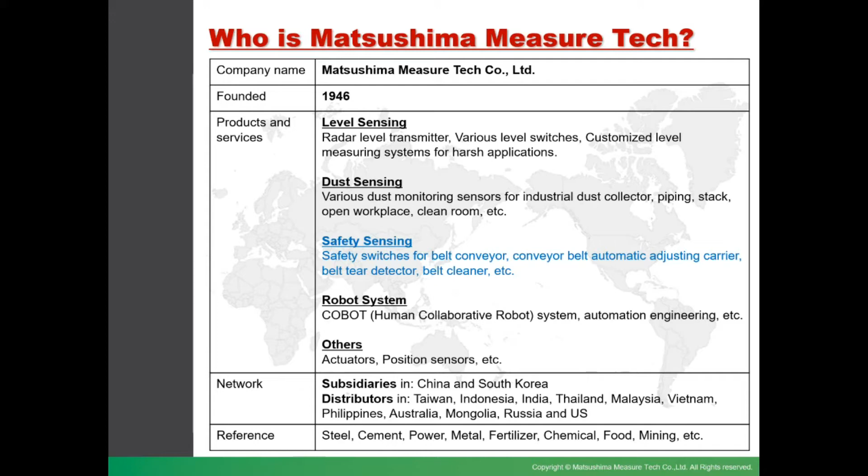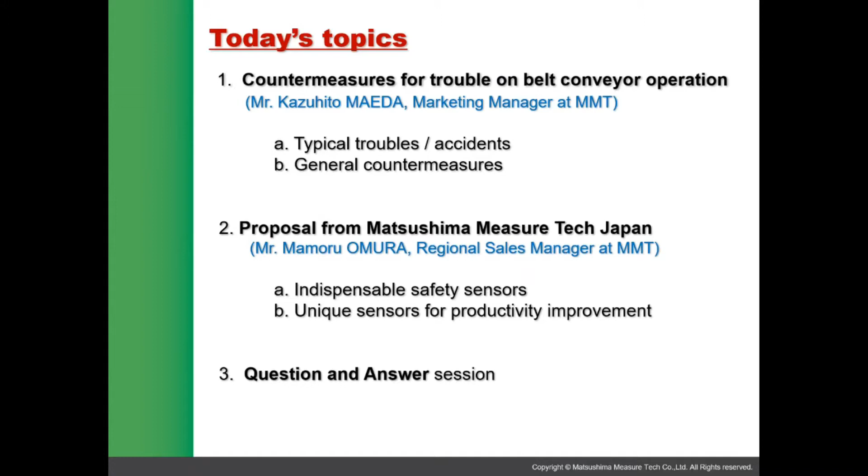Okay, this is today's topics. First session is for countermeasures for trouble on belt conveyor operation. I will provide information today about 6 types of typical troubles, major causes for those troubles, and general countermeasures. Second session will be provided by Mr. Mamoru Omura. He will be focusing on a few indispensable sensors and also introduce a few unique sensors for productivity improvements. Then, after this session, we will answer your questions.

Okay, so let me start the first session about countermeasures for trouble on belt conveyor operation. Actually, we've been involved in this industry over 70 years, since 1946. Based on this experience, we'd like to contribute to safe operation of belt conveyors by introducing a part of our experience and know-how. And we do hope our activity will be helpful to your activities and the industries.

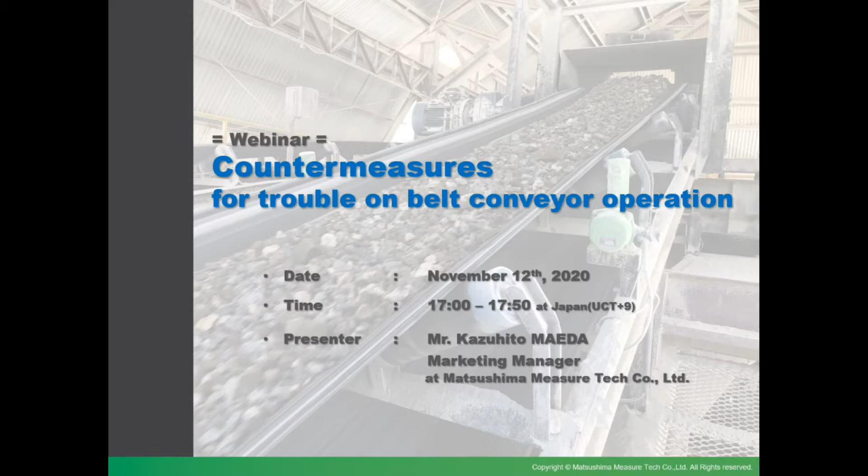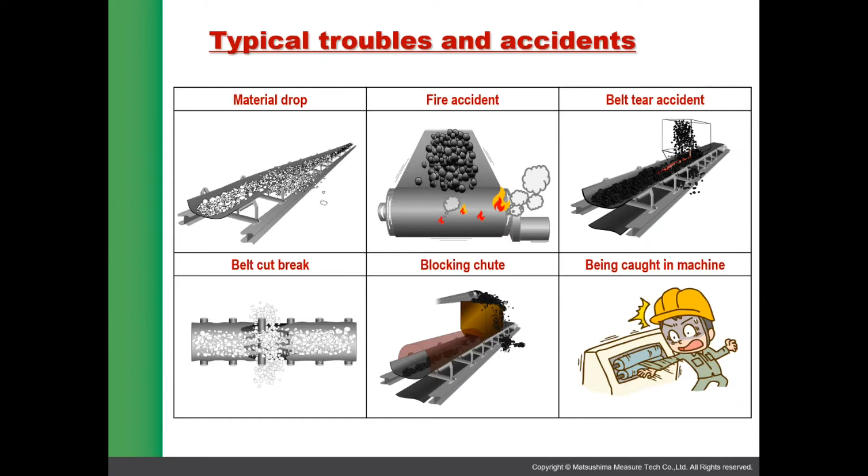Okay, today we are focusing on these 6 typical troubles and accidents, like material drop, fire accident, belt tear accident, belt cut break, blocking chute, and accidents that bring serious human injury. As you may understand, these are typical but really serious. These serious accidents, of course, cause huge loss in time and operation cost. But at the same time, they may bring maintenance cost rise, environmental pollution, human health damage or injury. So it's obvious we should take countermeasures as preventive maintenance. So let's see those causes and countermeasures one by one.

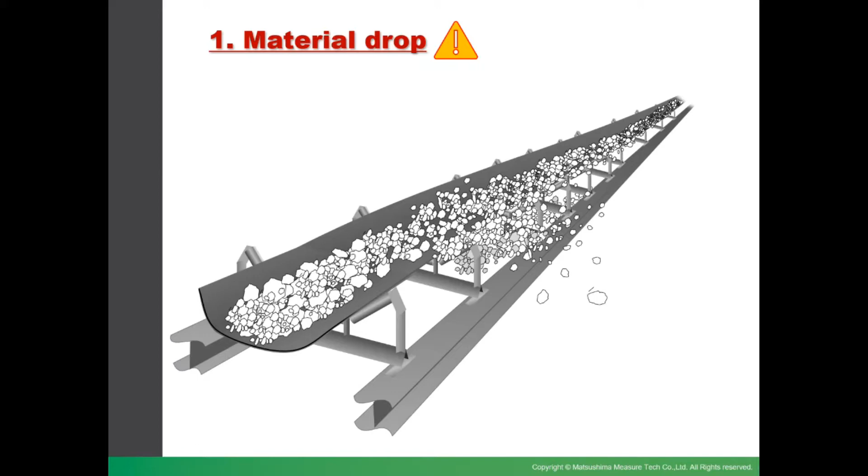First serious trouble is material drop. Belt conveyor runs on the balance of friction and tension. Belt conveyor is designed so that it may run straight without snaking or being misaligned, in case every condition is perfect and nothing changed from the ideal situation. But of course it's impossible, and that's why we have to take countermeasures. Anyway, the conveyor belt is not always aligned, but sometimes misaligned due to some conditions. And finally, it may cause material drop.

So what is the cause of such belt snaking or misalignment? We can say major causes are these 6 situations. Pulley or roller has got dirt buildup or adhesion. Roller is not rotating properly or broken. Transporting material is changed, loaded on one side or something. Skirt rubber is damaged or load material is bitten inside. Conveyor belt itself is damaged. Environmental situation change like heat, wind, moisture, rain or something.

All these factors may cause belt snaking or misalignment. And finally, it causes material drop, and of course it brings serious loss in productivity and maintenance cost. As you see those factors, it's really hard to solve fundamental causes. So we think it's important to take proper countermeasures, presuming that those causes may appear.

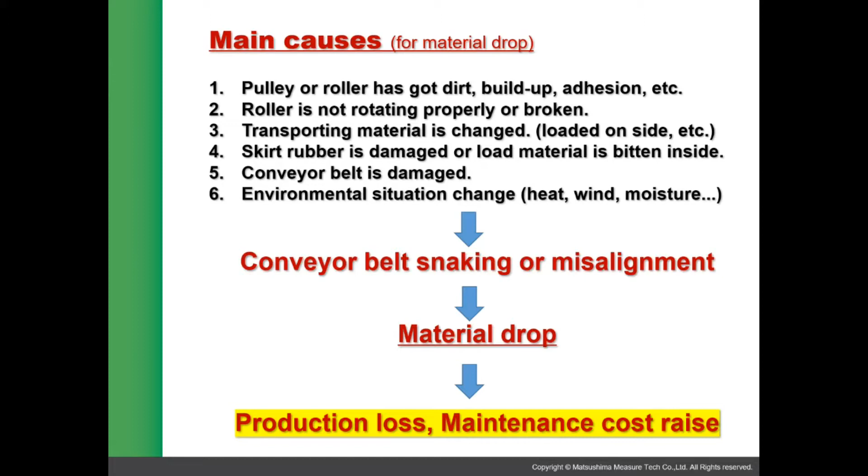Then here we offer these 4 countermeasures. The first one is to remove build-up material on the belt by belt cleaner. Belt cleaner prevents build-up on the belt surface. Then it means you can prevent build-up on the roller and pulley as well as the result.

Next solution is adjusting carrier. This carrier is to regulate the conveyor belt when it goes snaking or misaligned. Self-aligning mechanical carrier is the popular system, but in case the regulating performance is not enough for the site situation, then motor-operated adjusting carrier is the better solution.

The last one is belt sway switch to detect belt misalignment. You can get the alarm and the emergency stop signal when the belt is snaking or misaligned. Then you can stop the conveyor before material drop.

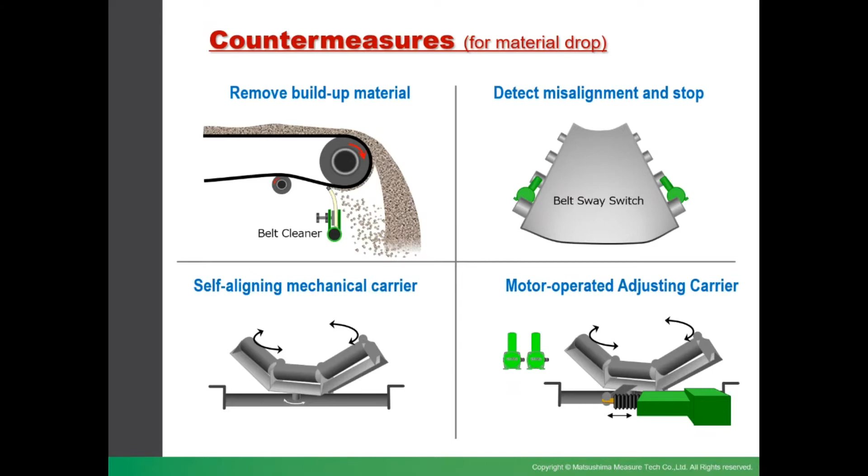Next trouble case is fire accident. As you may know, material of conveyor belt is rubber, and of course it's flammable. So it easily burns where there are fire sources at the site. This is also a serious accident and it may lose huge cost and time.

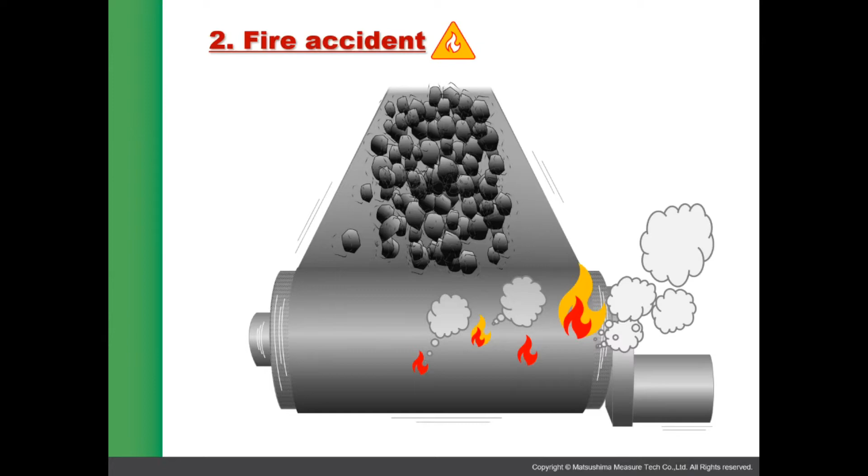Expected main causes for fire accident are shown here. Number 1, belt slip between conveyor belt and drive pulley. Number 2, heat due to malfunction of rotating parts like bearing or something. Number 3, friction heat between misaligned belt and frame. Number 4, heat generated from accumulated dust at roller stand or something else. The last one is ignition from the site work using fire.

Those causes may generate fire accident. Of course, it's also a serious accident, and in the result, it may cause production loss, maintenance cost raise, human injury, health damage, or air pollution. We have to take countermeasure for this as well.

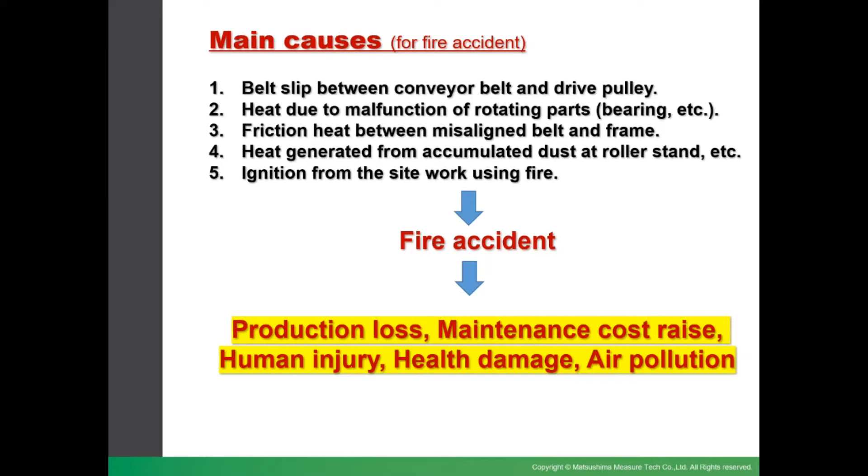These are the countermeasures for fire accident prevention. For the cause of belt slip, a detector should be the solution. This sensor is sometimes called speed switch, zero speed switch, or speed relay. All of them function the same. In case belt slip happens, then belt speed goes down. The speed switch detects dropped speed and sends the alarm or emergency stop signal so that you can stop the conveyor before fire accident happens.

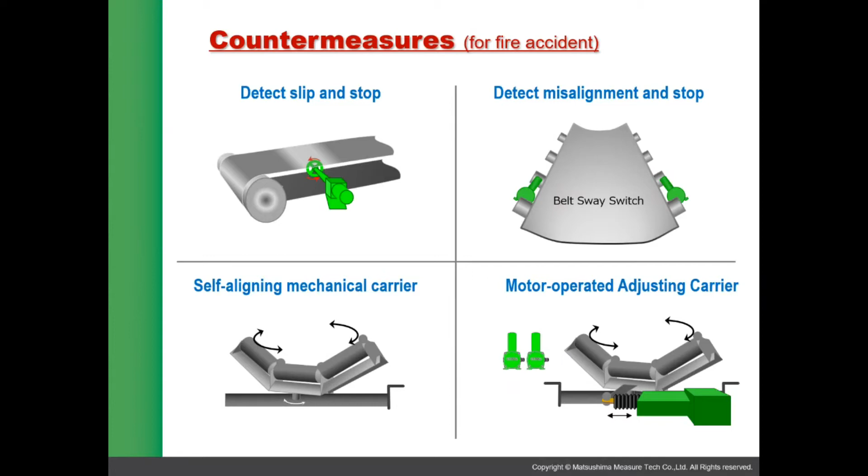For the cause of friction heat by belt misalignment, belt sway switch, self-aligning mechanical carrier, and motor-operated adjusting carrier are useful as explained in the material drop trouble section.

Next trouble case is belt tear accident. Sometimes wrong material or obstacles are mixed in the transported material. It's like a wood pole, metal tip, plastic, or something like that. If this wrong material sticks through the belt and is stuck there just below the transferring chute, then it happens. In the worst case, the belt will be completely torn out by the stuck wrong material. And in the result, of course, a lot of transporting material will be dropped out. It's a really serious accident, and it may waste huge money and time.

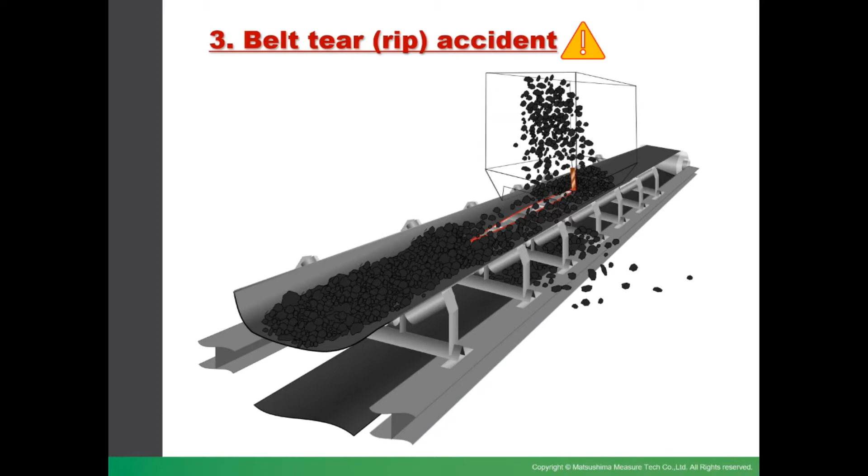So again, the main cause of such belt tear accident is wrong material or obstacle like sharp solid or metal mixed in the transporting material, which sticks through the conveyor belt and is stuck in the impact roller just below the transferring chute. This stuck wrong obstacle tears the conveyor belt. This is the belt tear accident.

And in the worst case, conveyor belt will be completely torn out. Then you have to prepare another complete belt. You have to place it again, and in the meantime, conveyor operation should be stopped. So it causes huge production loss and maintenance cost raise.

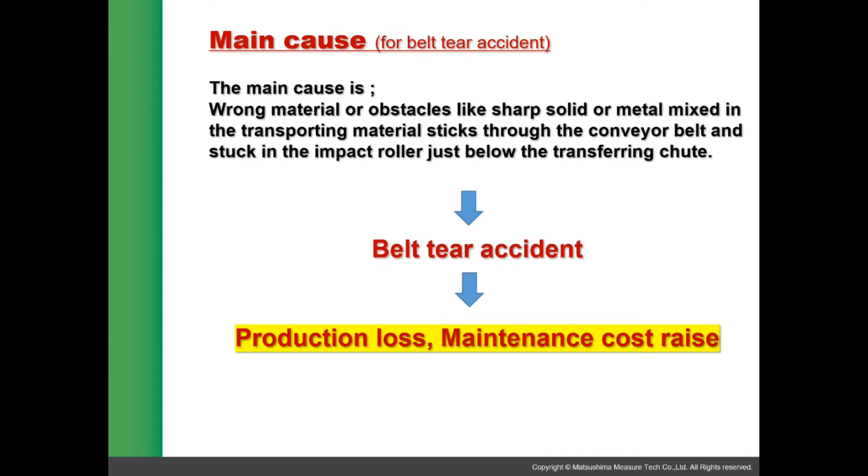Okay, these are effective countermeasures, I believe. In case the wrong obstacle is metal material, metal detector and magnetic separator will be a good solution. This is effective for metal material, but the weak point is, of course, it is not useful for non-conductive material like wood pole, plastic, or something else.

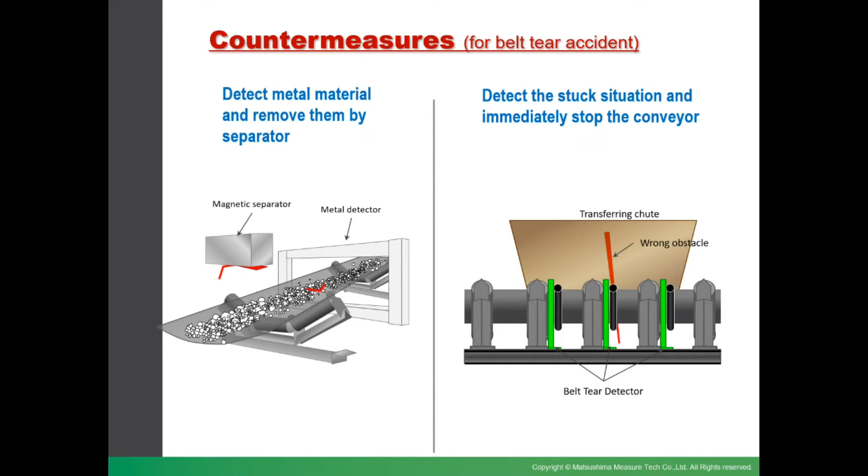So we generally recommend to install belt tear detector in every case. Sensor part of the detector system should be mounted just behind every impact roller below the transferring chute. This sensor immediately detects such wrong obstacles sticking to the belt, and it's possible to stop the conveyor in a few seconds so that you can minimize the loss.

Next serious trouble is belt cut break accident. We can say conveyor belt is a consumable part because it's tensioned and it gets impact load from loading material. In case the belt is continuously used for a long time over its lifetime, then this type of serious trouble is expected. This is really serious and dangerous. This accident may cause stop of operation, breakage of facility, and also serious human injury. Of course, it's better we take countermeasures.

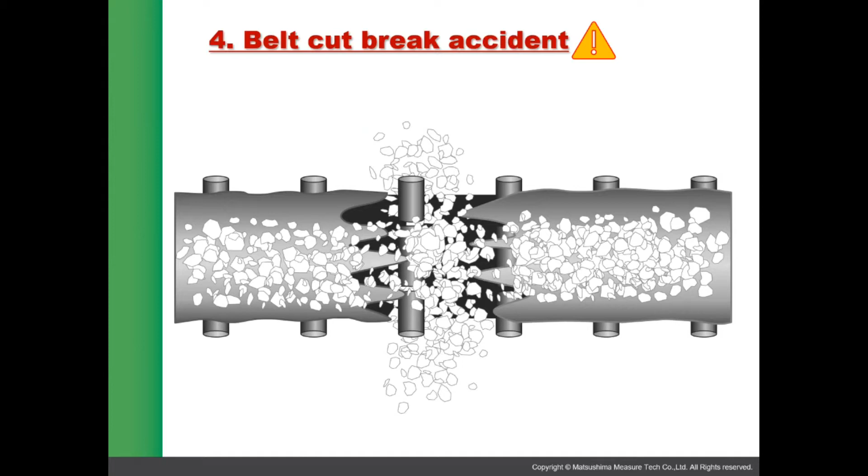Okay, these are the main causes for such a serious belt cut break accident. Number one, belt slip between the conveyor belt and drive pulley happens frequently. Number two, the rubber of the belt surface is worn and the inner fabric is exposed. In this case, you can see this phenomenon at many places. Number three, a crack or scratch on the inner fabric is observed. For example, you can see such damage over 10% of the width.

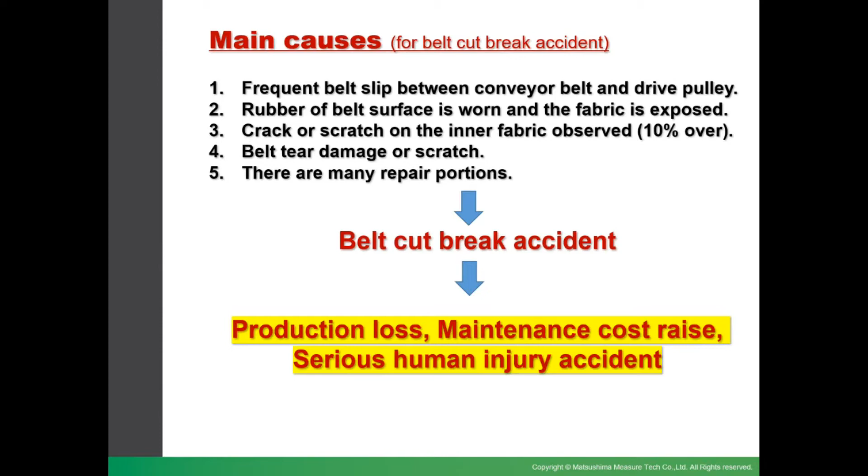Next is the case where the belt has damage, scratches or belt tears in many portions. And the last cause is the belt has many repair portions. When you observe such phenomena, a serious belt cut break accident may happen unless you take countermeasures beforehand. Once it happens, it may cause huge production loss, maintenance cost rise, and serious human injury accidents.

Such a belt cut break is a serious accident, but as I mentioned in the previous slide, there are many signs before it happens. In other words, it is possible to prevent the accident by taking the right countermeasures for such signs. You can take countermeasures with those sensors I explained in the previous troubles, like the speed switch for belt slip, belt sway switch, and belt tear detector. And also, we feel it's very important to establish an appropriate judgment criterion to replace the belt.

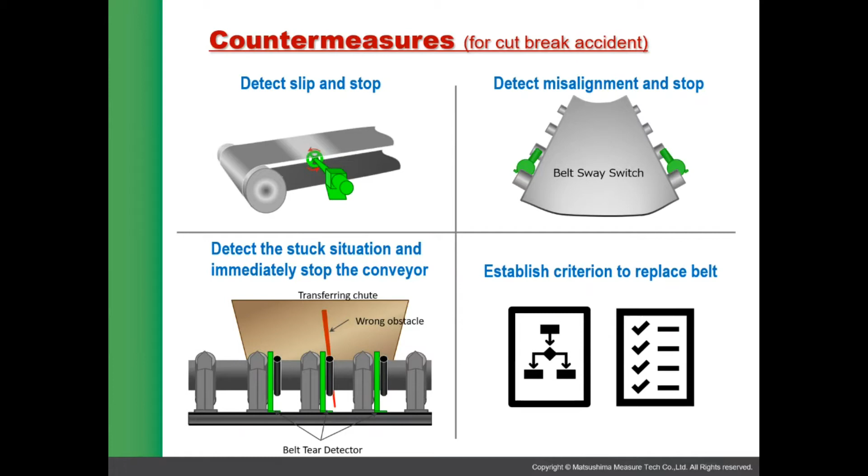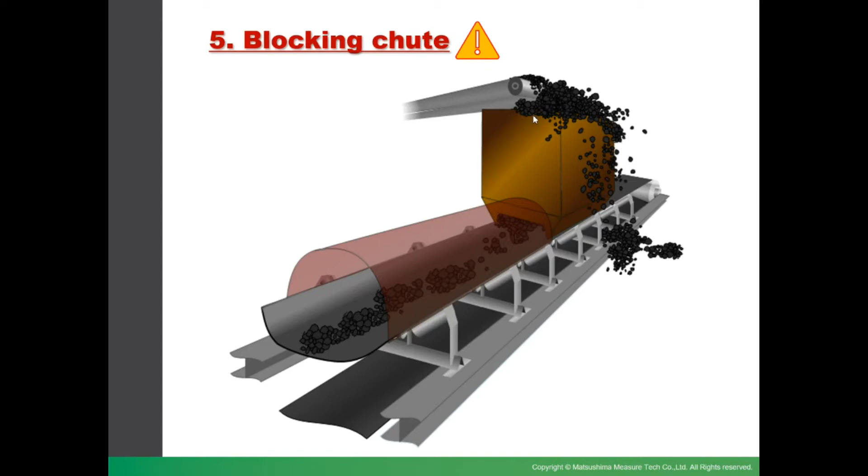The next serious trouble is the blocking chute accident. This is also serious. In the worst case, the transferring chute overflows and a lot of material drops. Besides, it may cause serious damage to the facility, and it may also bring some environmental pollution as well. Okay.

So the main causes for this blocking chute trouble are as follows. The conveyor belt is slipping, the load material is not going forward and keeps staying below the transferring chute. And the transported material is stuck in the transferring chute and not charged onto the conveyor. So it causes a blocking chute accident. And finally, it may cause production loss, maintenance cost rise, and environmental pollution.

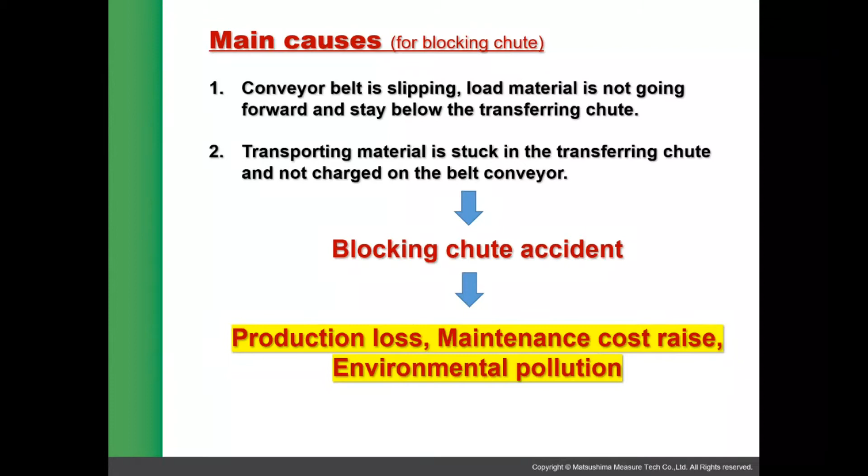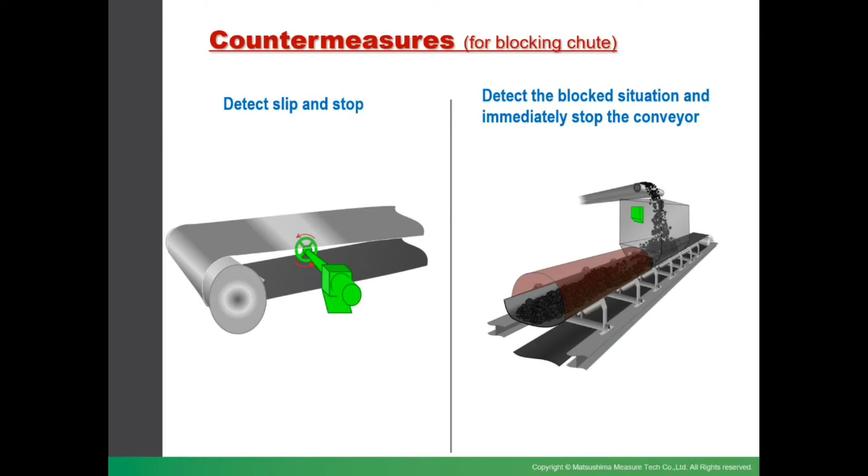As I explained a few times for the other troubles, belt slip detection by speed switch is the solution for the belt slip situation. And for a blocked situation inside the transferring chute, a point level detection switch will be the effective countermeasure. You can install the right level switches as upper limit detection to stop the conveyor. Actually, there are various types of level switches according to the type of transported material. But for detailed level switches, we are considering having another web seminar in the future, including continuous level transmitters. So please let me skip the detail for level switches today.

A conveyor facility has a lot of hazardous sources, such as rotating components or driving machines. If a human is caught in the machine, needless to say, it's very serious. So I believe in most cases the conveyor must have a safety cover or the area should generally be a keep-out area. However, there is no end to such human injury accidents, so we have to take countermeasures.

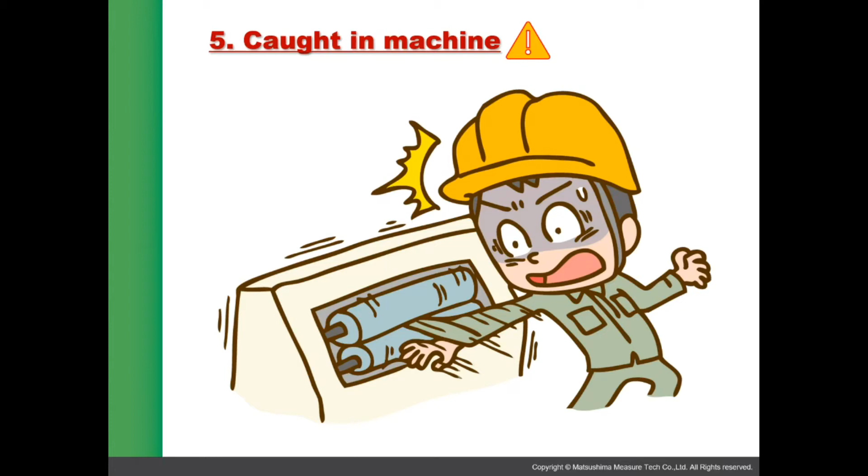The main cause of this accident, in a word, is human error. I'm going to read out those typical human errors. Number one, someone started the conveyor during the repair work. Number two, the self-driving system started the conveyor during human repair work at the site. Number three, someone did the build-up removal work without stopping the conveyor. Number four, someone unintentionally touched the rotating pulley at a conveyor without a safety cover.

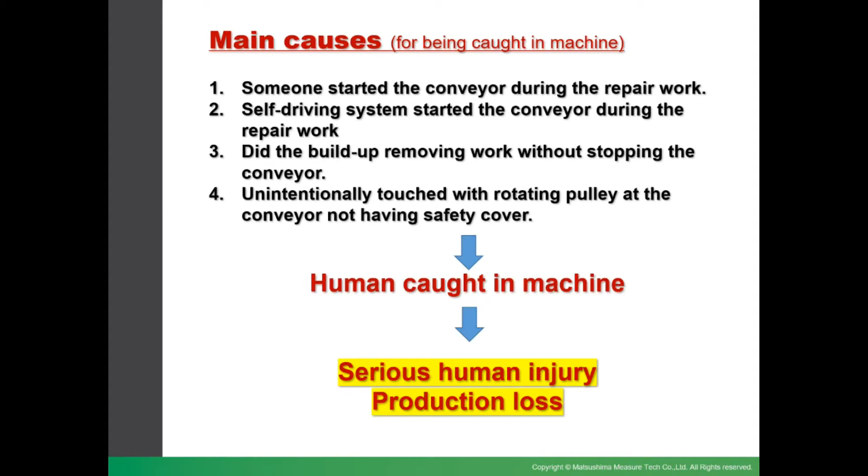Then such an accident, where a human is caught in the machine, happens. It may cause serious human injury as well as production loss. Actually, I feel completely eliminating such human error is quite difficult. So we have to take countermeasures on the assumption that human error happens.

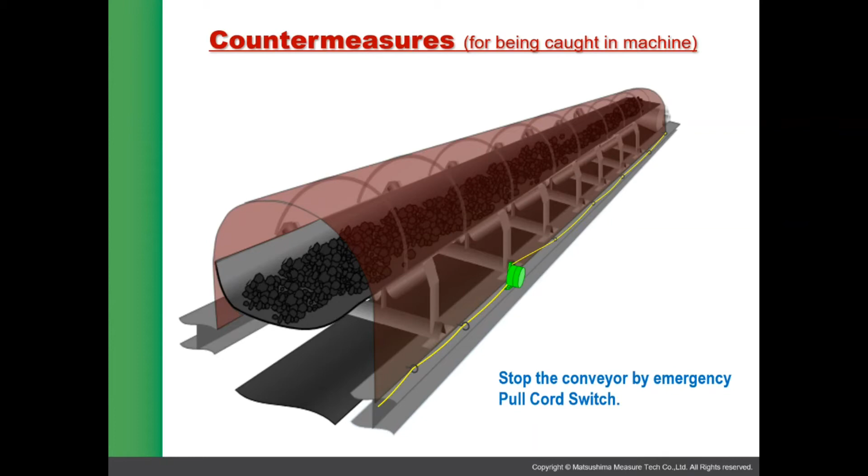Okay, so I picked up 6 types of serious troubles, like material drop, belt accidents, blocked chute problems, and others. And these are 9 types of common countermeasures effective for those 6 troubles. Today, I've just mentioned the types of countermeasures because time is limited. But we are considering having another web seminar for more details of those 9 countermeasures, including points of attention and how to use them.

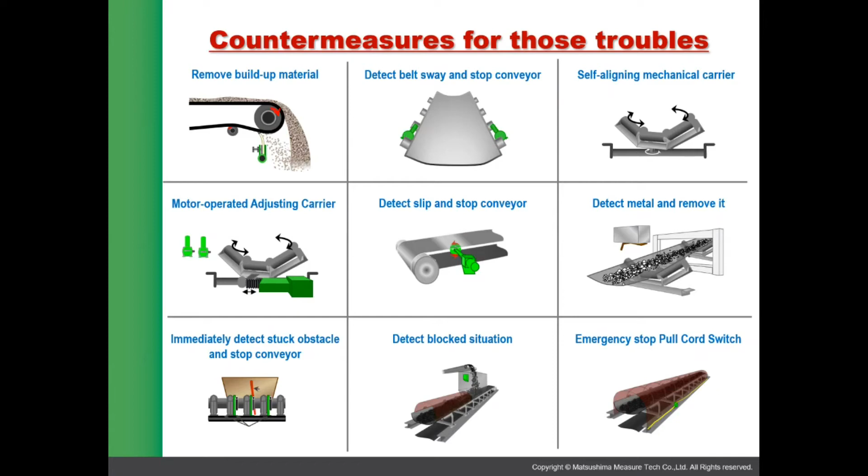Okay, so just a moment.

Okay, thank you so much for your attention on my part, countermeasures for trouble on belt conveyor operation, today. I will be very happy if my part is helpful and useful for your activities and operations or something like that.

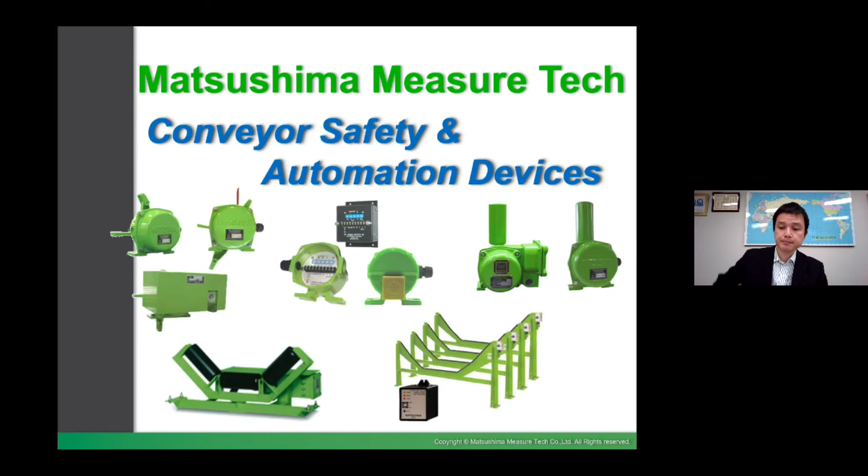Thank you, Mr. Maeda. I'm Mamoru Omura, export staff in Matsushima Measure Tech. Now you found out the importance of safe conveyor operation. In my section, I'd like to introduce the Matsushima conveyor safety and automation devices to support your safe conveyor operation. I'd like to introduce the 2 types of conveyor protection switches. One is a simple safety switch, and another type is Matsushima unique protection devices.

First one is the simple safety switches. I expect that most participants are already familiar with these switches. They are simple switches, but they are essential for safe conveyor operation. Therefore, Matsushima switches are selected and applied by many industries in the world because they are highly reliable and highly durable.

The first switch is a pull cord switch. It stops the conveyor immediately to minimize the accident or casualty. If it is delayed to stop the conveyor, it results in a critical accident. Also, the pull cord switch can be applied for accident prevention at the conveyors. When walking around the conveyor, for example, idler replacement work, the activation of the pull cord switch is one of the precaution treatments as the interlock at the site, because the conveyor cannot be activated by mistake.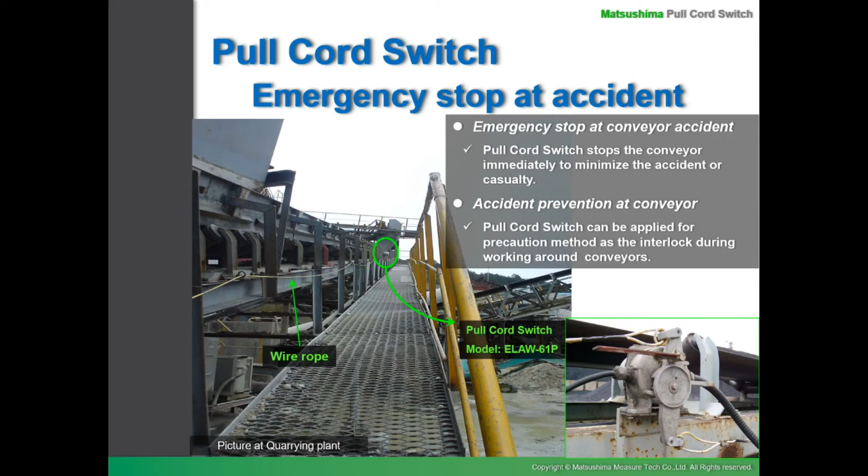We have option models for the pull cord switch: explosion-proof type, DC micro switch type, and salt-resistant coating type to use near the ocean.

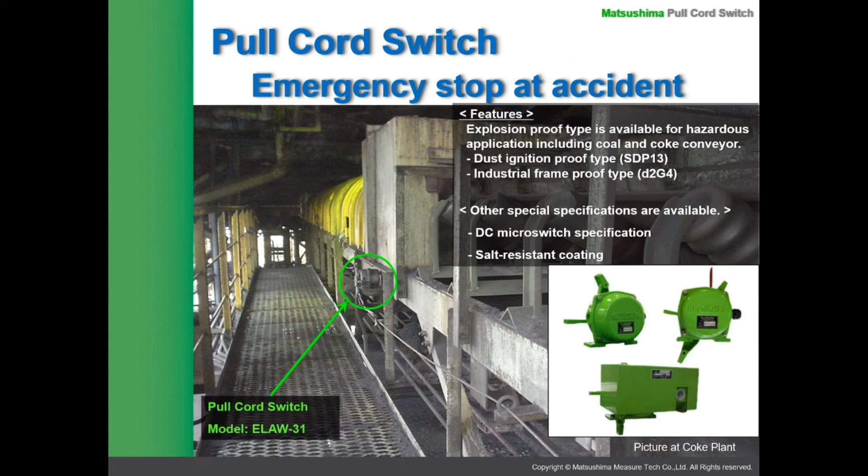We also have an advanced model, so-called PULLSTOP. It is an emergency switch complied with ISO standard. It has several advanced specifications. First, you can find in this picture, the wire rope is kept tensioned for this switch. If a wire rope is cut off, PULLSTOP detects it and outputs the signal. Next, the push button is also available for the emergency stop. Also, a total of 100 meters, 50 meters for each side, can be covered by only one unit.

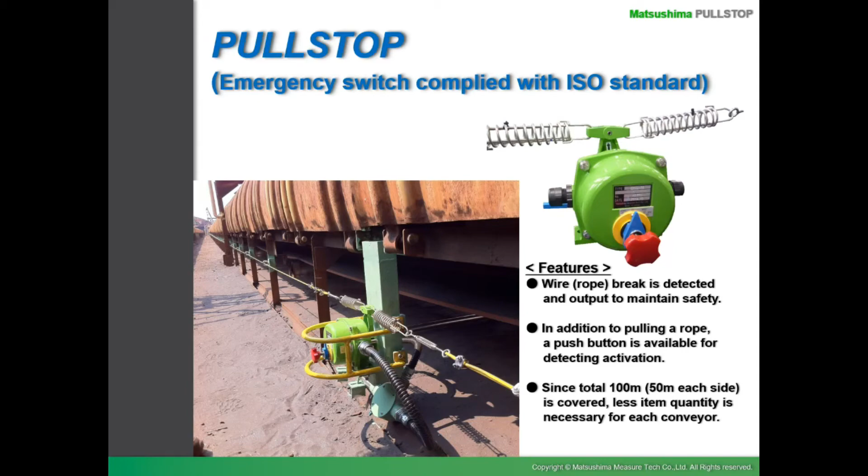Second model is the belt sway switch. When the conveyor belt is misaligned, the materials on the conveyor fall down. It causes loss of the materials and may cause an accident. Also, the edge of the conveyor belt gets the impact by the friction with the facility. It reduces the belt lifetime. The belt sway switch detects this misalignment and prevents these losses and accidents.

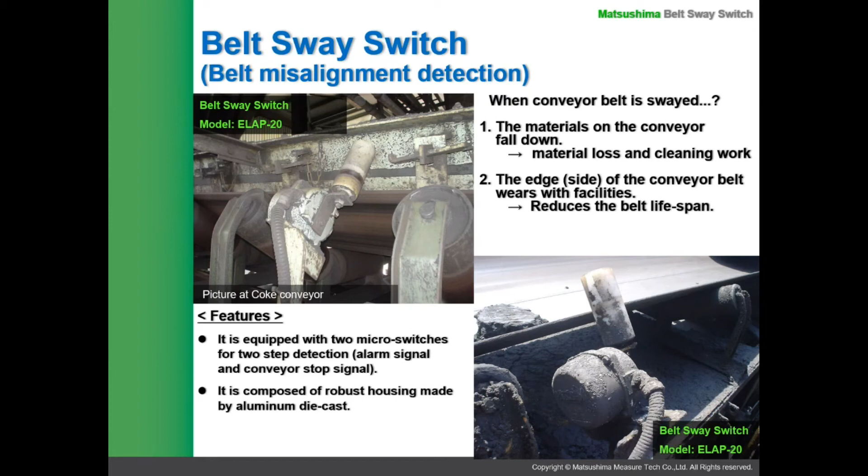As a feature, it is equipped with two micro switches for two-step detection. One for alarm signal and another one for conveyor stop. Also, because it has a robust housing made of aluminum die cast, it can be applied in heavy-duty environments like these pictures. We have option models for the belt sway switch: DC micro switch type, salt resistant type, stainless material for the touch pulley type, special operating angle type, also explosion proof type.

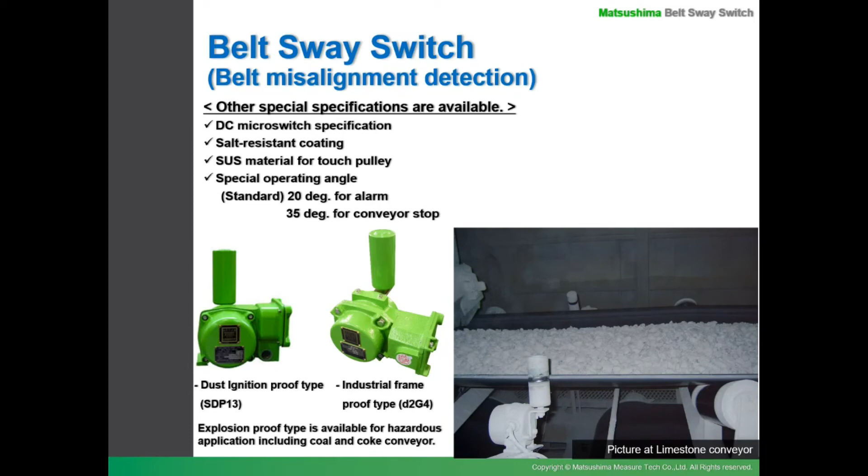The next simple switch is the two types of speed sensor. First one is the magnetic type, which does not require a power supply. When the conveyor belt slips, the friction between the belt and the driving pulley may cause a fire accident. The speed relay detects these belt slips and outputs the signal to stop the conveyor before the fire accident.

As features of the speed relay, because power supply is not required, the wiring installation cost and work can be reduced. Also, because it is mechanically activated by the magnetic function, it can work even in the case of power outage. Our speed relay also can be applied for overspeed detection, for example, cranes and elevators.

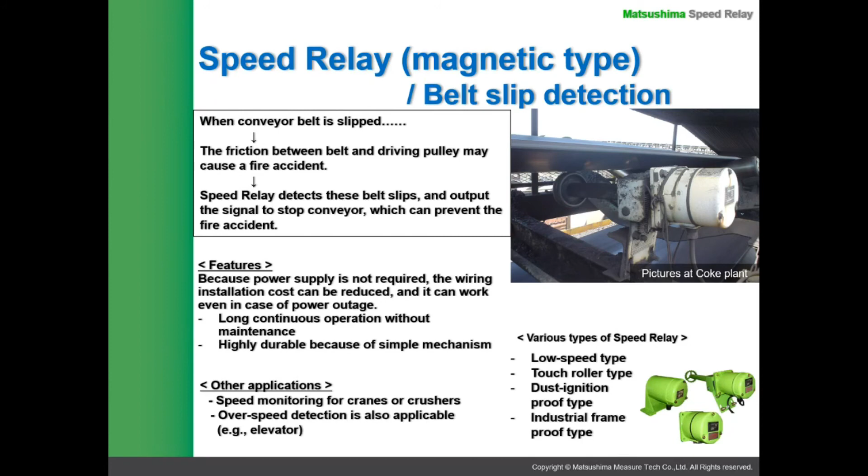The second type of speed monitoring sensor is the proximity switch type, so-called speed switch. As a feature of the speed switch, because it is a proximity switch, it is a non-contact sensor. Also, actuating speed can be set up at the site by the customers, and a wide range of power supply is applicable: DC 24 volts and AC 20 through 240 volts. We have a variety of types of speed switch: separated proximity switch type, transducer in panel mounting type, touch roller type, and intrinsic safety type.

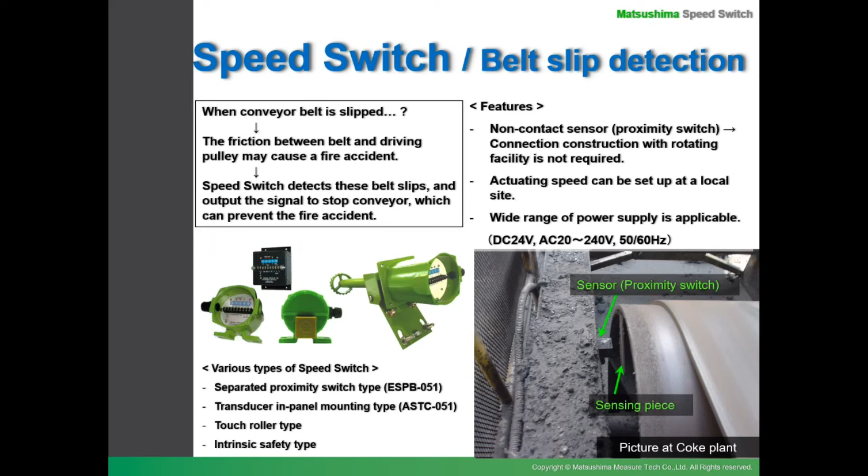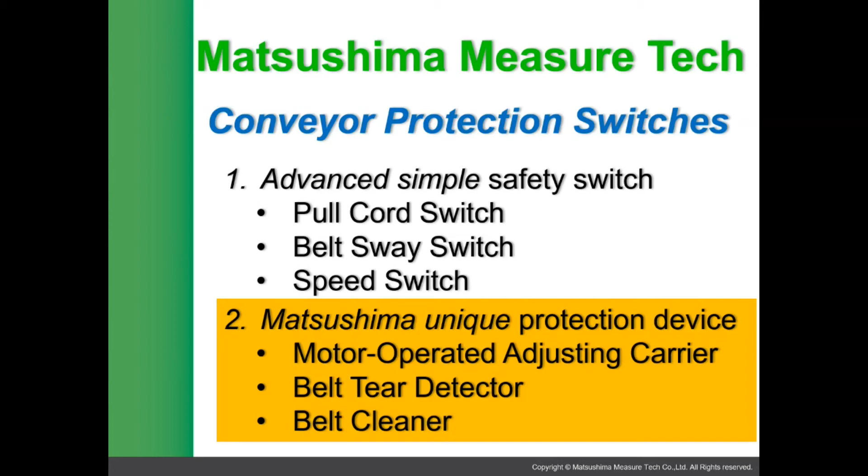Next, I'd like to move to the Matsushima unique protection devices: motor operated adjusting carrier, belt tear detector, and belt cleaner. The first unique device is the motor operated adjusting carrier. As explained in the belt sway switch section, conveyor belt misalignment causes the loss of the materials and reduces the belt lifetime. Matsushima motor operated adjusting carrier detects the misalignment and corrects it automatically by a powerful carrier. It avoids belt damage and results in accident prevention.

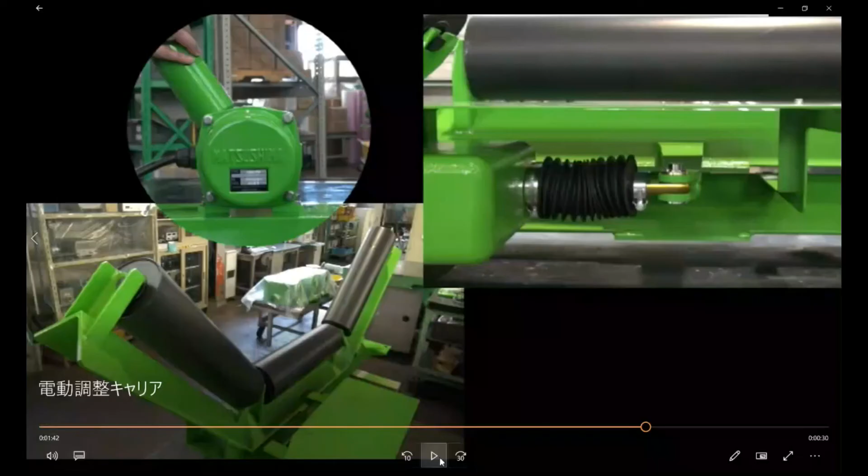These detectors continuously monitor the conveyor's misalignment, and according to the signal from the detectors, the adjusting carrier corrects it automatically. We will show you the video for this system. According to the detector's tilting angle, the cylinder of the carrier shifts the carrier, push or pull. And this carrier forces the correction of the misalignment of the conveyor. We also have a reversible conveyor type as an option. We will move back to the slide again.

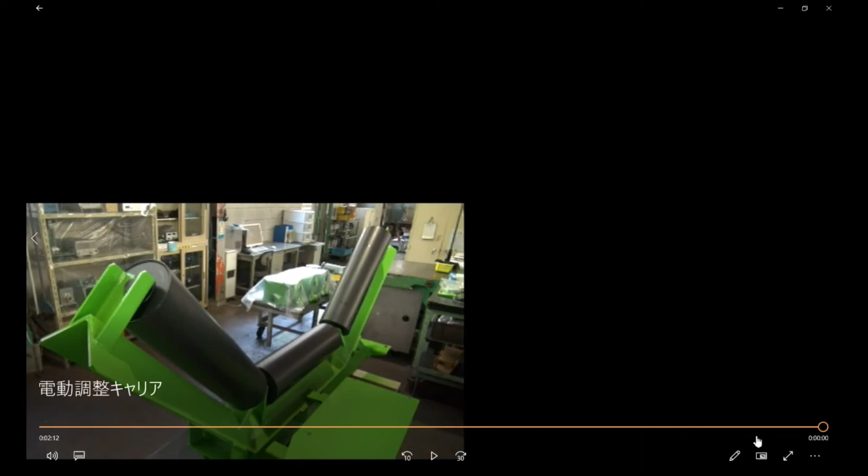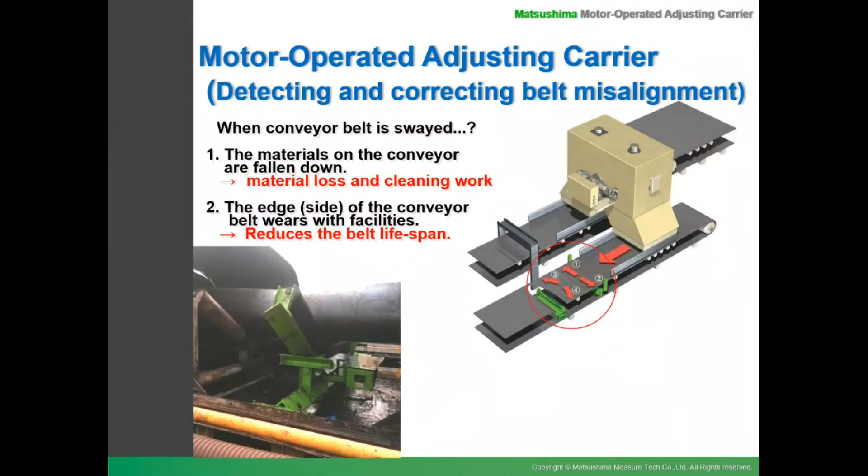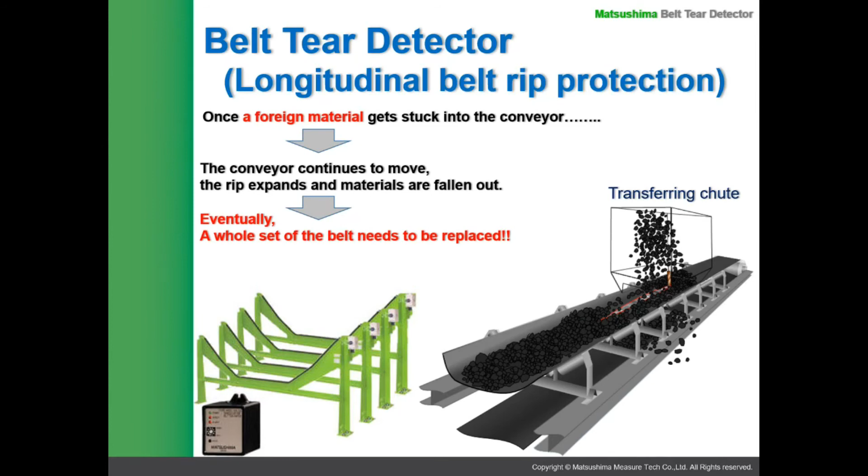Next, I'd like to introduce a belt tear detector. Most belt tear accidents happen at the transferring chute. When the material transfers to another conveyor at the chute, foreign material gets stuck into the conveyor. The conveyor continues to move, the rips expand, and materials are falling out. Eventually, a whole set of the belt needs to be replaced. This is an actual belt tear accident.

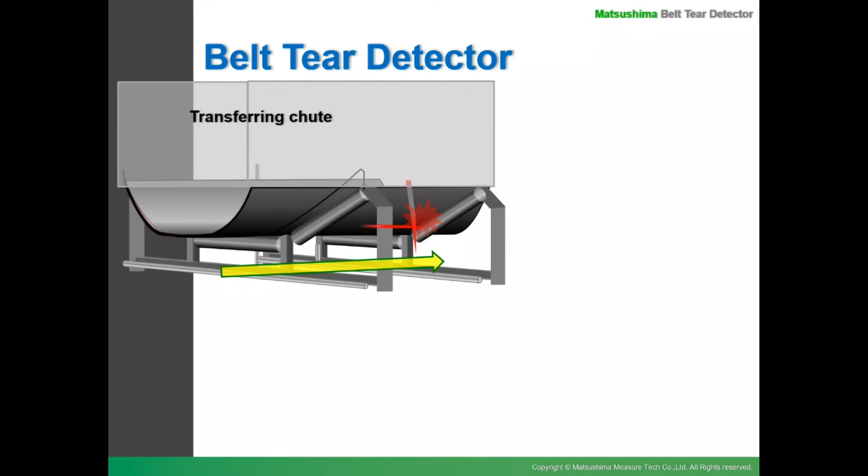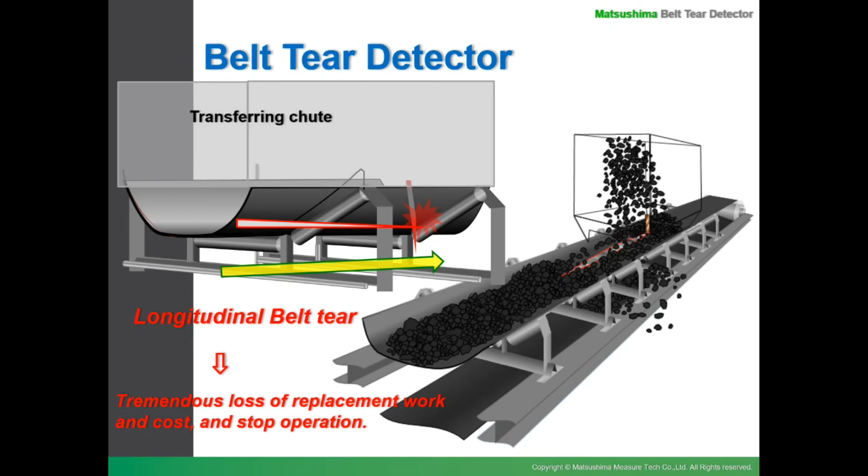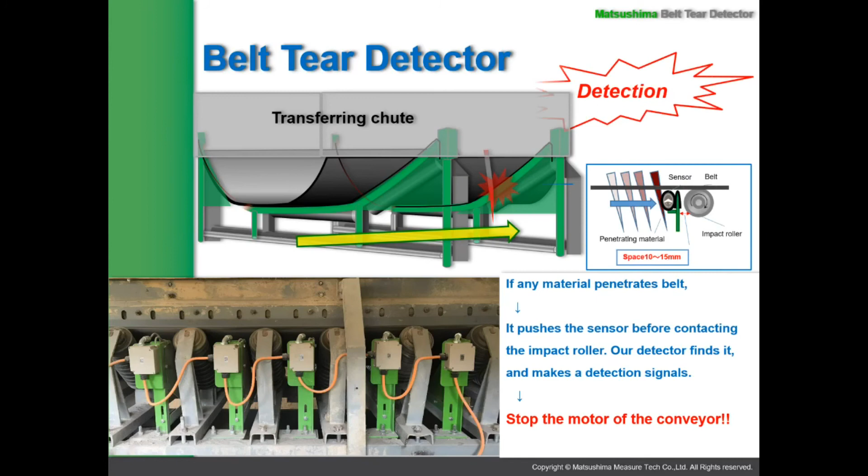Again, once foreign material gets stuck into the conveyor, this material stops at the impact rollers and it expands the belt rips. Longitudinal belt tear results in tremendous loss in replacement work and cost, and stopped operation. To prevent these belt rip accidents, Matsushima belt tear detectors are installed next to each impact roller. If any material penetrates the belt, it pushes the sensor before contacting the impact roller. After detecting the foreign material, the detector outputs the signal to stop the conveyor.

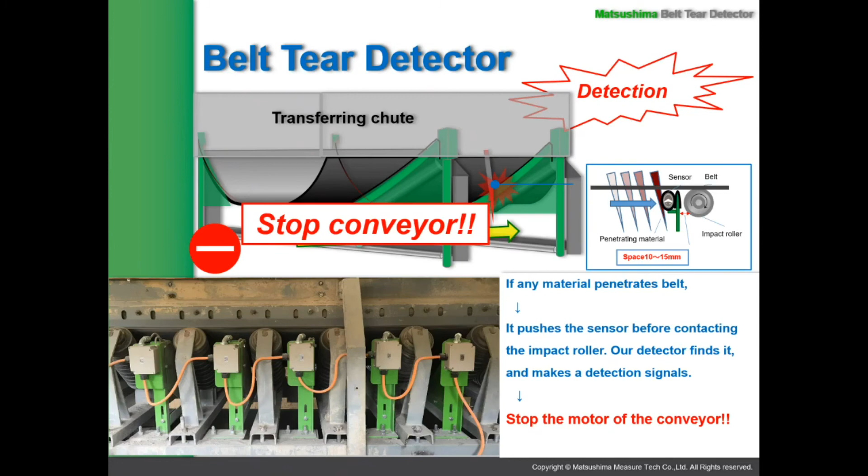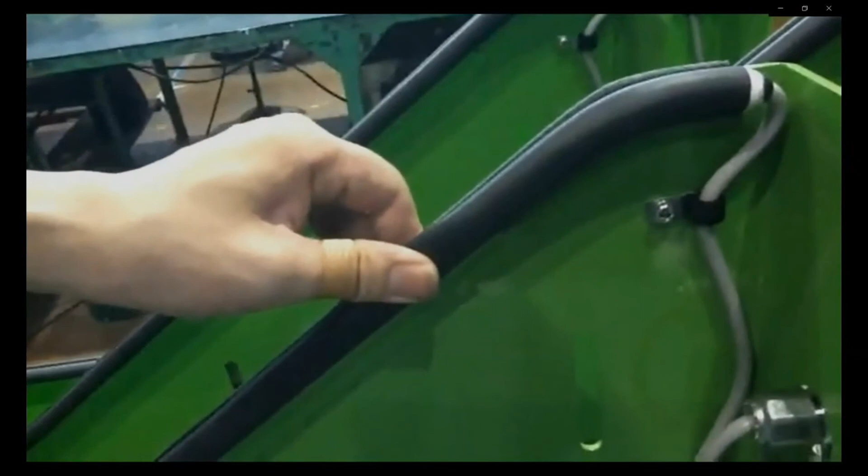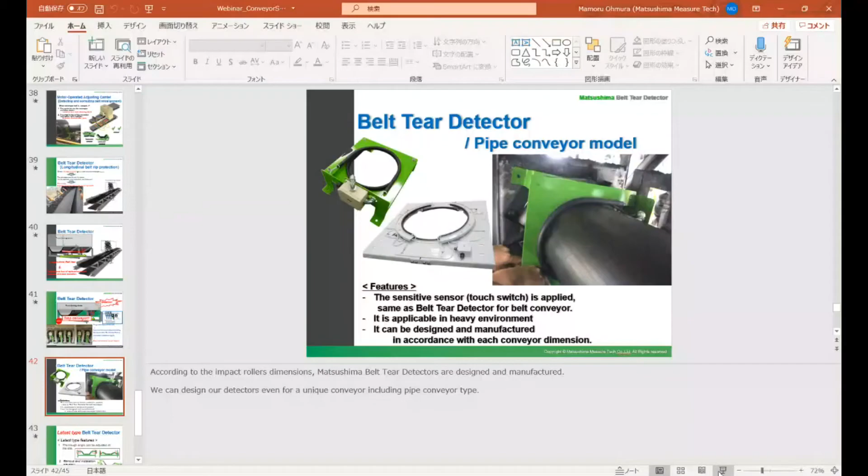Okay, we will move to the video again to make a clear image of the touch sensor. The touch sensor is made from conductive rubber. If any material contacts this sensor, it outputs the detection signal. Since our belt tear detector is designed and manufactured in the same proportion as the impact roller, it never misses any materials. Okay, we will move back to the slide again. According to the impact roller dimension, Matsushima belt tear detectors are designed and manufactured. We can design our detector even for unique conveyors, including the pipe conveyor type.

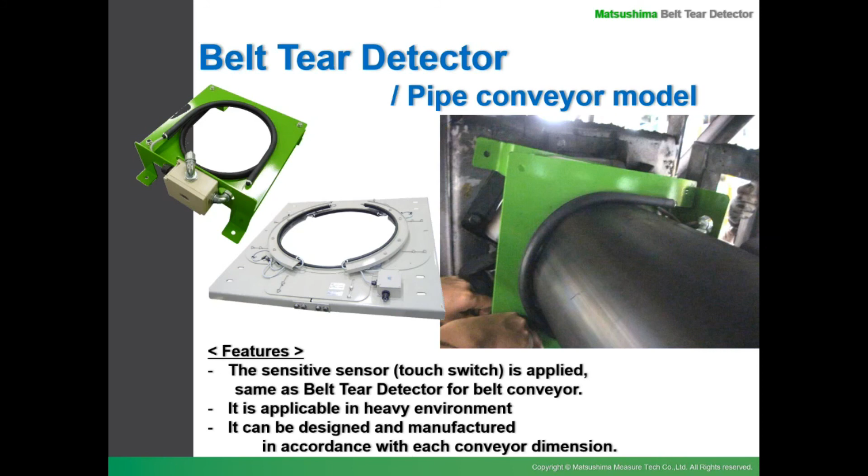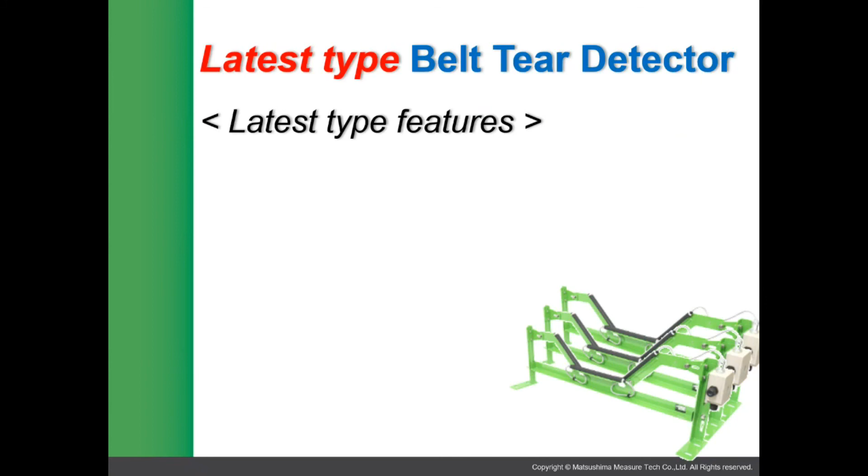We would like to introduce the new type of the belt tear detector. The trough angle of the latest type is adjustable at the local site. According to the actual idler angle, the customer can adjust the angle of the detector to match the impact rollers. Because of this angle adjustment, it is easier to remove and install the detector. You can see the convenience of the latest type in the video. I will move to the video again.

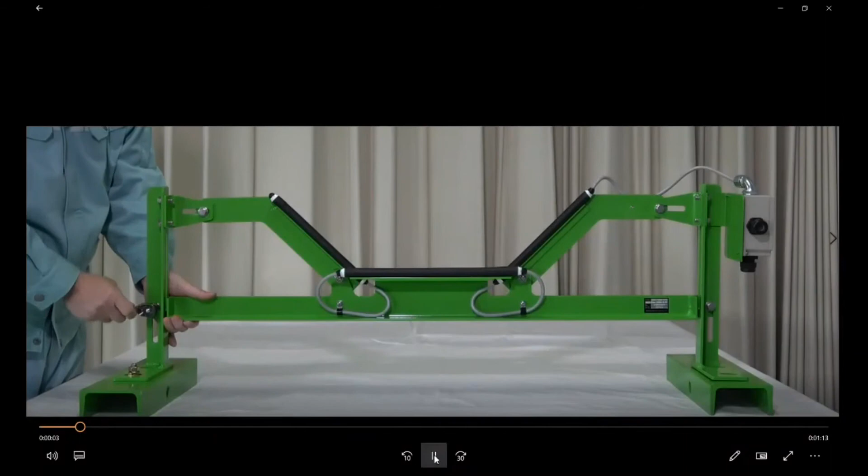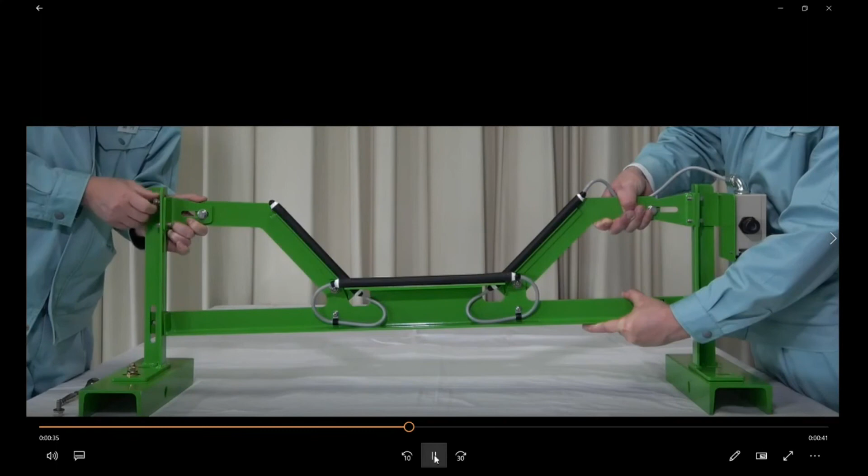First, you can see it is easy to remove and install the detectors. After taking out the 3 mounting bolts on only one side, it can be pulled out easily. When the former type detectors are installed in some limited space applications, the idlers need to be removed or the conveyor belt needs to be shifted up to install each detector. For the new angle adjustment type, it is easy to install the detector without removing any other conveyor parts.

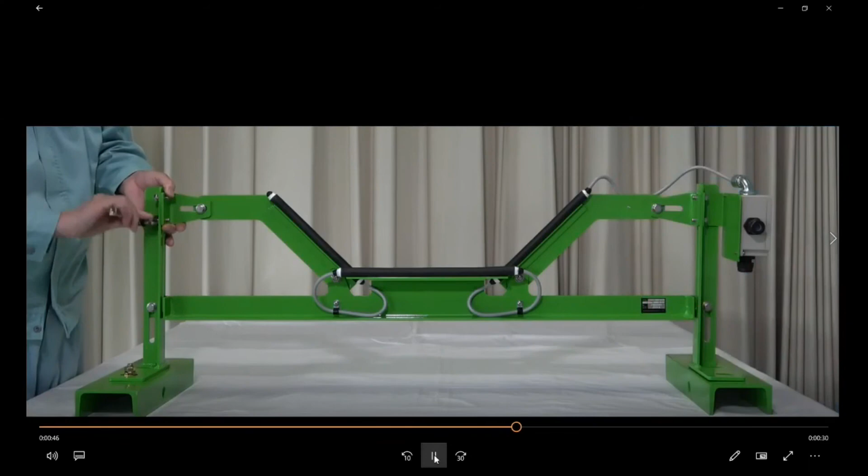Next, it is easy angle adjustment. After releasing the three bolts, the trough angle can be adjusted at the site. After adjusting, fix the bolts again like this. Okay, I will move back to the slide again.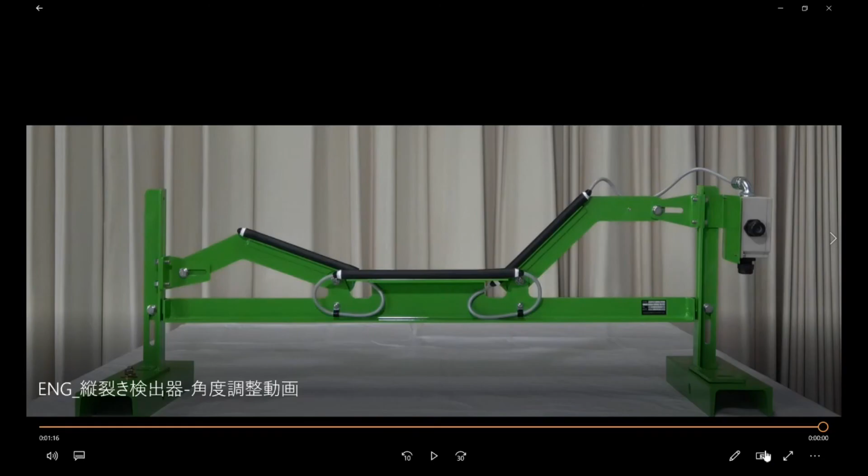The last model is a belt cleaner. If there is no cleaner, some materials build up on the conveyor and fall down somewhere in the conveyor line. It causes material loss, cleaning work, and conveyor accidents. Therefore, a belt cleaner is necessary if conveyed materials accumulate on the conveyor surface. Because each scraping tooth has a 15 mm width, our cleaner smoothly follows the surface of the conveyor belt. The flexible urethane bar is applied to support the scraping teeth, so conveyor vibration does not influence the cleaning performance. It is easy to install and adjust because of its simple construction.

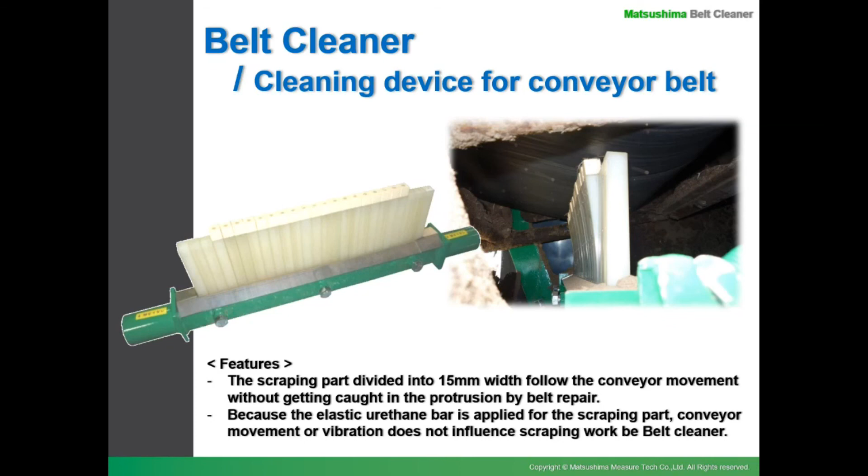I introduced the two types of conveyor switches. One is a simple switch, and the second one is unique protection devices. These models in this seminar are a small part of our product range.